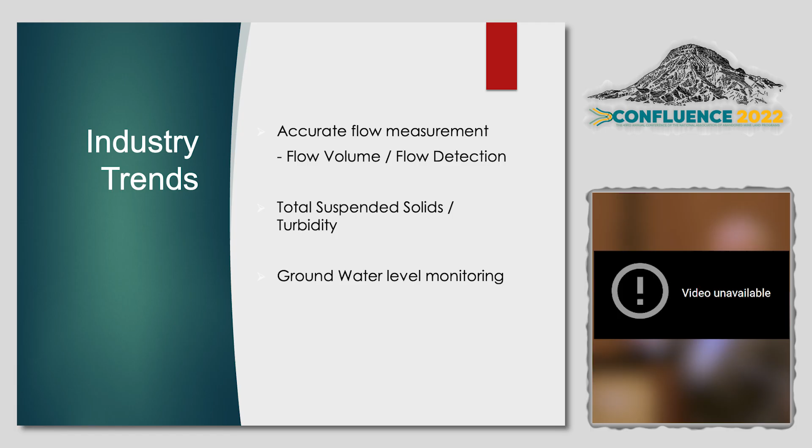With new NPDES permits being issued, we're noticing that a lot of emphasis is being put on accurate flow. A lot of states are setting up their total maximum daily load for sedimentation, and to get this, they need to know a better amount of flow that's coming off of these mine sites. And also total suspended solids or turbidity is another big one as far as monitoring the sedimentation.

Another big one is groundwater level with monitoring wells. There are systems out there now that can be placed in situ and will monitor the water level continuously. The benefit of that is the data can show trends, like during different times, different seasons, different weather patterns, how the groundwater level changes.

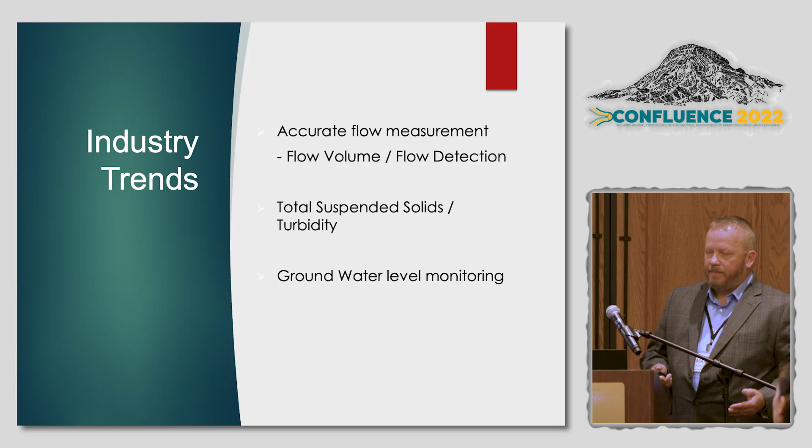The benefit of long-term monitoring is it allows the policymakers and the operators to get a big picture of what their operation is and figure out where their issues lie and what they need to do to fix their issues if they have any. And it'll also help track progress toward reclamation goals. We feel this could be very beneficial on abandoned mine lands when you're trying to get final reclamation done.

Most of these systems, if it's an actual remote system, use telemetry to transmit the data. Basically, data is collected in the field and then it's transmitted. We've found that these systems can be placed in the most remote locations with the use of satellite technology. The data can be transferred back to our servers instantaneously.

A lot of times we get questioned, how do you verify your data? Well, there are several processes. At my company, we have a QA and QC program that's basically a combination of using the factory calibration done on the meters and sensors, and also handheld meters and sensors that are EPA approved in most cases or fall under some sort of ASTM standard for calibration.

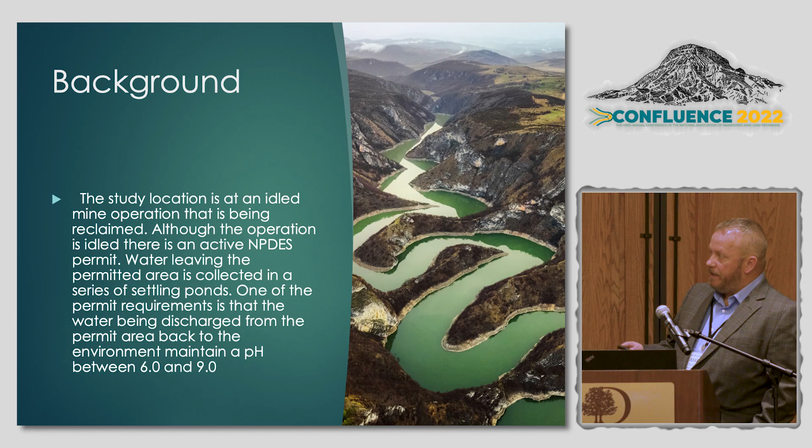So here are the problems we identified. The untreated water has a very low pH. The pH is only measured once a day, most of the time. The pH was measured using the pocket pens that you get from Hach and other companies. And the permit requires that the pH range be 6 to 9. It's an inactive site, so like I said, they have no employees there, and it's about a 45-minute drive one way to get to the site.

Some other identified problems: on their chemical dosing, they had no way to control it. Like I said, it was a drip. They just turn a valve, and so sometimes they may boost it too much. And if anybody's ever been around using caustic, it does what it needs to do as far as boosting the pH, but putting too much of it into the environment is not a good thing. Without traveling to the site, there was no way to stop the treatment, and they had no way of knowing what the pH was. And the caustic's expensive too.

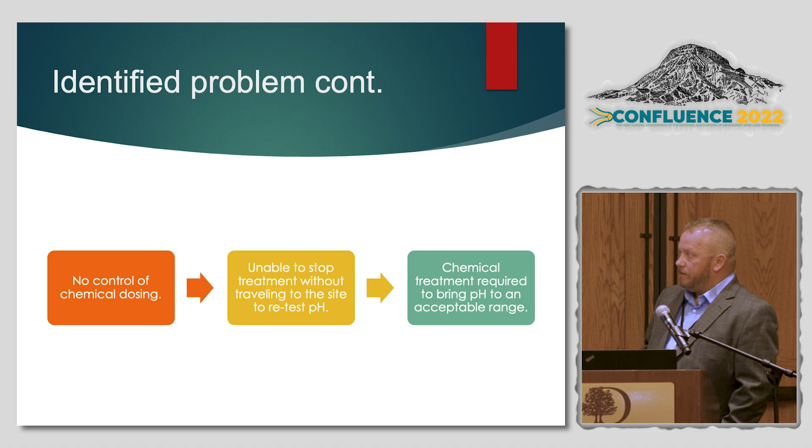So under the NPDES permit, if the pond's not discharging, there's no requirement to treat the water. So that's where they had to make a judgment call. So a lot of times they were wasting chemicals, or the pond would start flowing without being treated. So then they're in violation of their NPDES permit for the pH of the water.

And here again, if the pond stopped discharging while they were using the chemical treatment, they had no way of stopping it or knowing that the pond had stopped flowing. If you have weekends or holidays, you could go several days without anyone being on site. So you're just feeding chemical into the water for no reason.

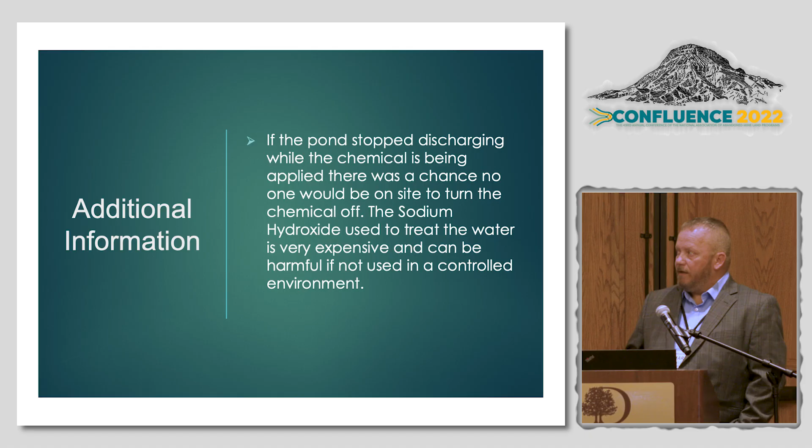So we came up with the solution. We installed a remote pH monitor and a water level monitor at this outfall. And the way we set up our report, we designed it to show not just what the water level was, but what the water level was in relation to the discharge pipe. So when the customer logs in and sees their report, they see that the water is a foot from discharging. So we put these systems in, and they were in almost a year when we started doing this case study.

And then this data we can narrow it down to hourly data if you needed to see how it changed from if you weren't treating it, when it started treating. And this gives the client or the customer, or the operator, a chance. He can look at this data over long terms, and he can see if there's certain times of the day, certain seasons, certain weather patterns, all this information when he really needs to be concerned.

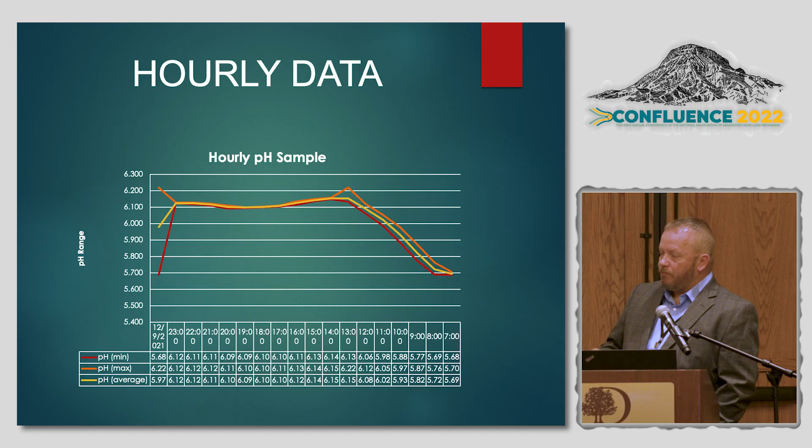On top of getting alerts with the pH, the system also sends him alerts if the pH drops to, I believe we said if it drops to 6.5, he gets an alert. If it's flowing. If it's not flowing, he doesn't get an alert. But he can log in at any time and see what the water level is and what the pH is at that time.

These are some of the benefits of that. He has 24/7 access to real-time data. This pH meter takes a reading every minute. So he's able to see it, and when he downloads his data, he can break it down. He can look at it every minute if he wanted to.

System alerts for any parameters of concern. On any of these systems that get installed, alerts can be set up if you have a parameter. If it's a rain gauge and you get a certain amount of rain within a 24-hour period, if you want to check your ponds or your outfalls or your dams or ditches, you have that. So that gives you more control, better decision making, employee safety, which is a big one.

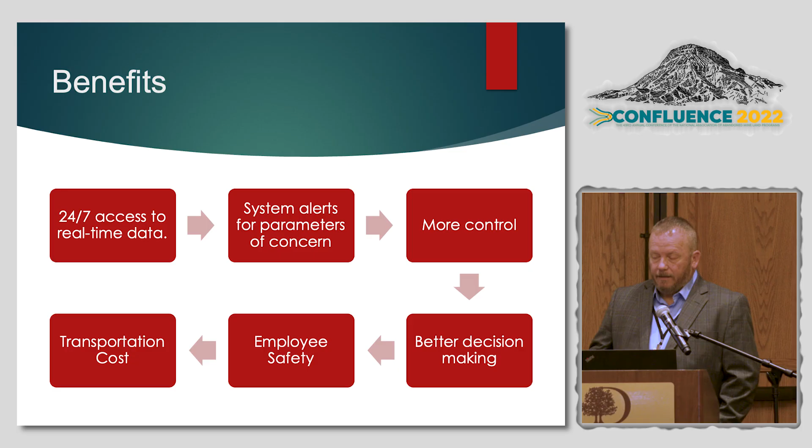So now this client is not having to send his crew out, driving 45 minutes one way twice a day. So that's all that time on the highway. Plus, they're able to use them to do their actual jobs on site. So they're not having to go and take care of this every day. Then you have transportation costs, hauling the chemicals to the site. And not just that, but the cost of the chemicals.

This is a cost comparison for 6 months. It came in 300-gallon totes. Before we installed the system, they were using around 7 totes every 6 months. And with the cost at that time, and it's probably more than that now, the cost was about $15,000 for those 7 totes. After we automated the system and they had better control over it, they only used 3 totes of caustic, and it's the same water. So that cut their cost down to $6,600.

The cost of this remote monitoring was only about $2,700 for that same time period. So when you figure all that in, they're saving about $12,000, and it may even be more than that now with the cost of everything going up. Their total savings is about $12,000 a year.

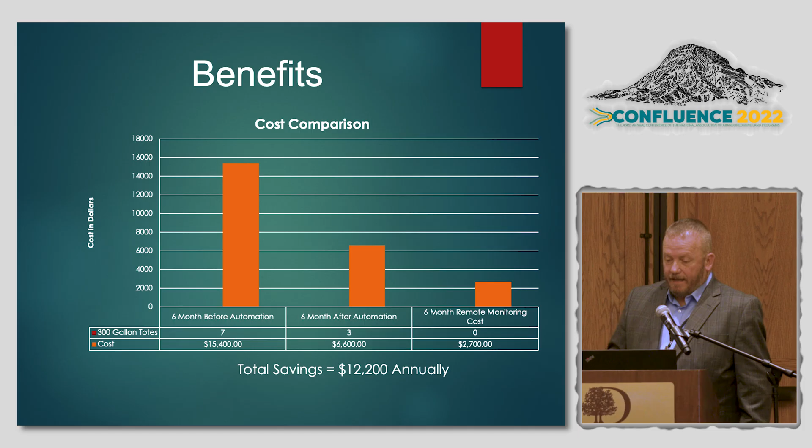There's systems out there that can be bought and installed by the operator, but most of those systems either use their proprietary telemetry, or you have to make a trip to the field. It may collect data 24/7, but you still have to go out and retrieve the data. A lot of them have a USB interface where you download it to a computer, and then you go back to your office and look at it. And that is an option depending on the operation.

Like I say, deployment options. You can purchase equipment, and your sensors and meters can be installed by whoever purchased them, by the operator, by the agency. Or you can use a turnkey service, which is what we happen to offer. All monitoring, sensors, equipment, we install it, we maintain it. The end user, whether it be a government agency or a mining company or whatever, they don't have to touch it. All they have to do is just collect their data.

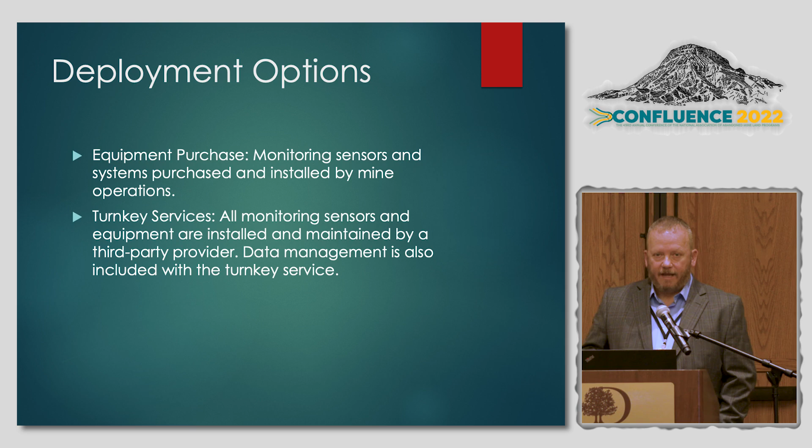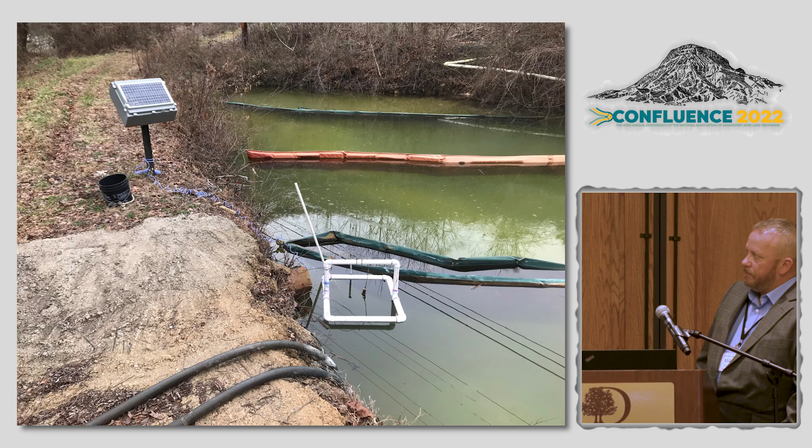This is some pictures of the site. You can't really see the water level meter because it's underwater, but the float thing there, that is the pH meter. We've got it suspended there, so it's right by the discharge pipe, which you can see. The discharge pipe's right there. And so we're getting the best reading right before it discharges.

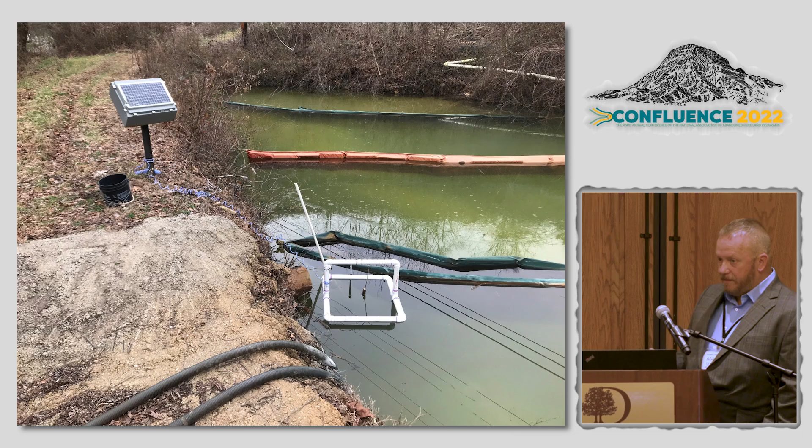And you can see this pond is actually a series of ponds. On the other side, there's a bank there, and the water is piped. And then they have a series of these curtains to try to clean up the water before it's leaving the site. And that is our system there. It's totally self-contained. No electricity is needed. Everything's done either via cellular or satellite to transmit the data.

Some other examples of remote monitoring. This is a coal mining operation, and they wanted to get a better crack on how much water is leaving their site for their flow instead of just doing the normal go out, well, it looks like 100 gallons a minute. So we were able to put in flow meters to calculate that flow. And the issue we found here was the downstream area

is very flat. So what was happening is the water was backing up into the channel during times of heavy rain. So we were able to put in a velocity meter as well right there, so they know that when they look at their data, if the CFS looks weird, they know it's because the water is backing up, and their permit allows for them during flooding situations that they can have alternate limits.

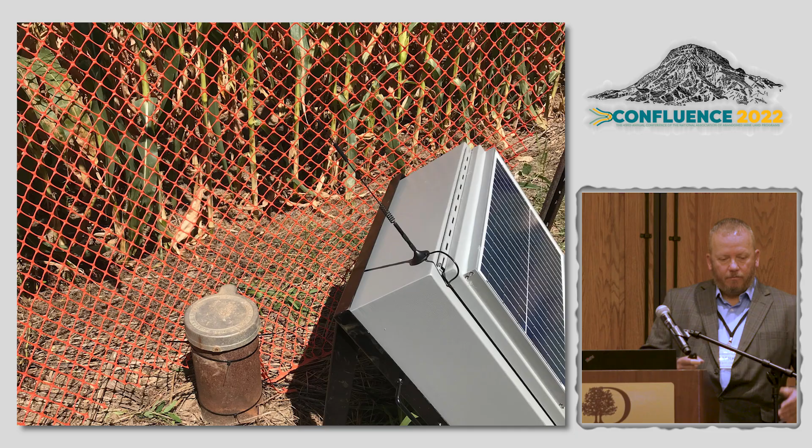This is a groundwater well. The operator is required because it's very close to farmland, as you can see from the corn there. There were concerns about blasting actually affecting the water level at this site, so we were able to install a water level meter in the groundwater well. So now they have 24/7 access to the data, so they can see: this is when we blasted, this is what the water level did here. So it gives them a big picture of what's going on at their sites.

This is another situation. The state wanted more accurate flow instead of just estimates. And this is what the customer was dealing with. They had two pipes discharged into just a rock channel that ran off site. And it was really almost impossible for them to really get an accurate flow monitor or flow amount.

So we were able to install a Parshall flume and a water flow meter to get an accurate flow for them. So it went from what the other picture showed there to now the flume catches all the water, whether one pipe or both pipes are discharging.

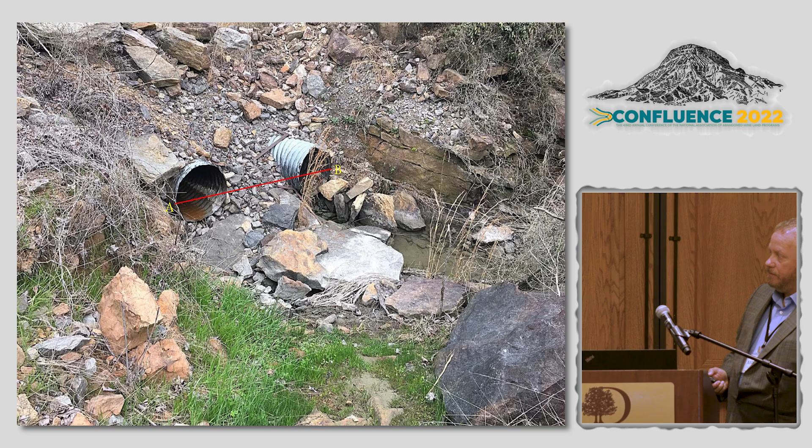This is an example where the customer didn't really need a flow amount. They didn't need a quantity. They just needed to know when the pond flowed for a couple reasons. It told them when to take a sample, and they were able to calculate how many hours per day the pond flowed, which was what was being required by their permit.

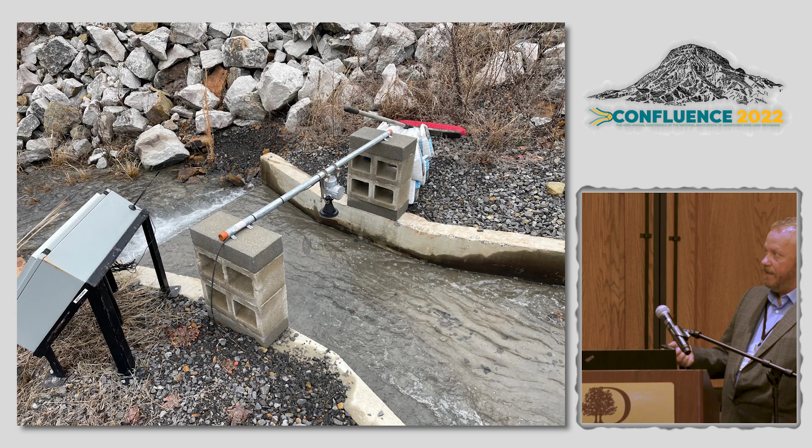So what this is here is just a water detection probe that's in that pipe. So when the pond flows, the water flows through the pipe, they get an alert that the water's flowing. And then the system calculates that you had positive flow for 6 hours a day or whatever it is. And then they're able to look at that and report those numbers so that they can set up their TMDL program.

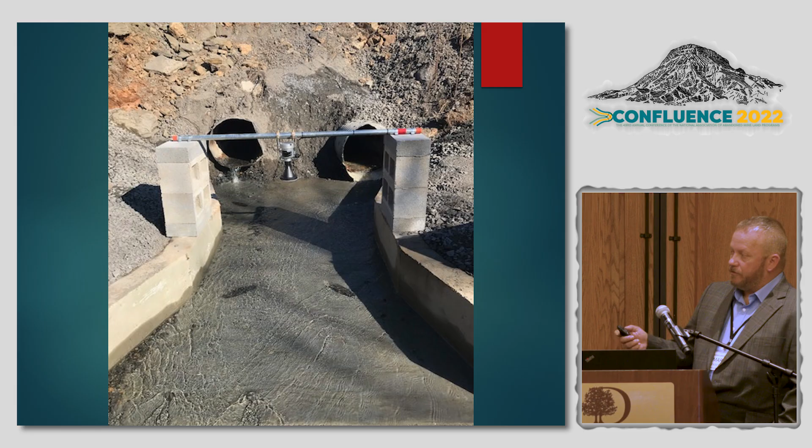This is on an impoundment where they were having trouble with very high TSS, and this client was being required to monitor. So this is actually a turbidity meter. So at this decant pipe, when the water flows, they're able to see what their turbidity is, and then they can make changes downstream if they need to put it into a holding pond or if they can let it just go off.